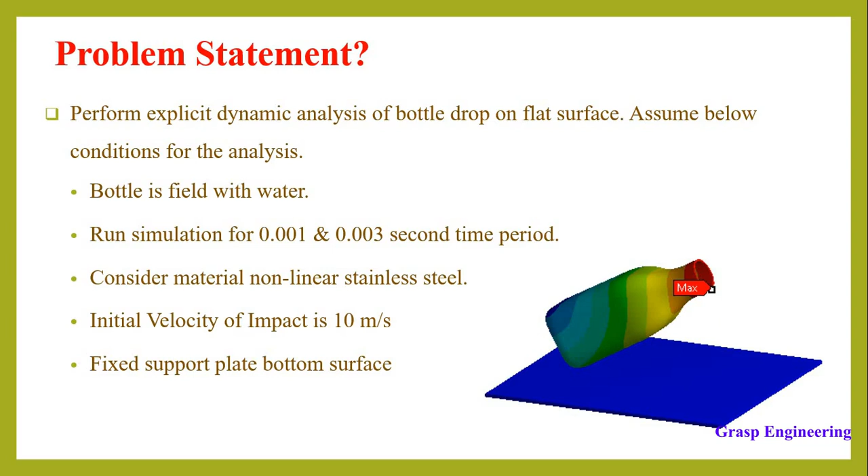So what we'll do now is go into our ANSYS model, and there we'll perform this simulation.

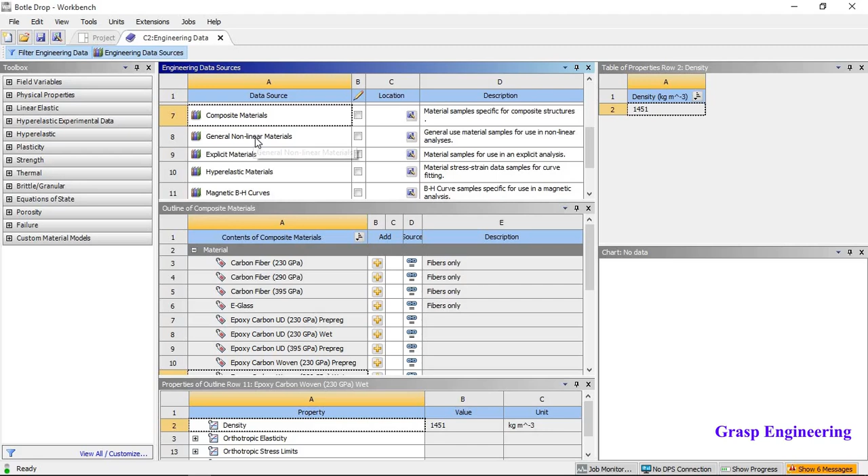In order to consider a new material, click here, go to engineering data source, and from here you will find that if you click on a different category, the material details will differ for each respective group. For general materials you will find options ranging from aluminum alloy to grey cast iron and stainless steel. For our case we need a non-linear material, so click on the category or data source called general non-linear materials, and whatever non-linear materials are available will show on the list.

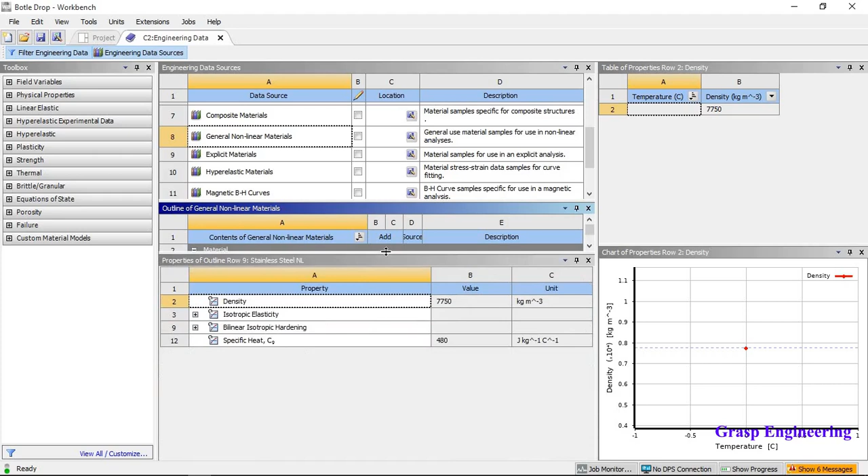Here we need to consider stainless steel. To do that, click here, and once clicked, it will show a book symbol, which depicts that you have incorporated this material, stainless steel non-linear, into your list. These are some of the bilinear isotropic hardening materials, and you can see the material details here.

Now let's close this, and here you can see we have considered stainless steel as the material. If you want to change the color, it will reflect when you assign this material. Close this and now refresh.

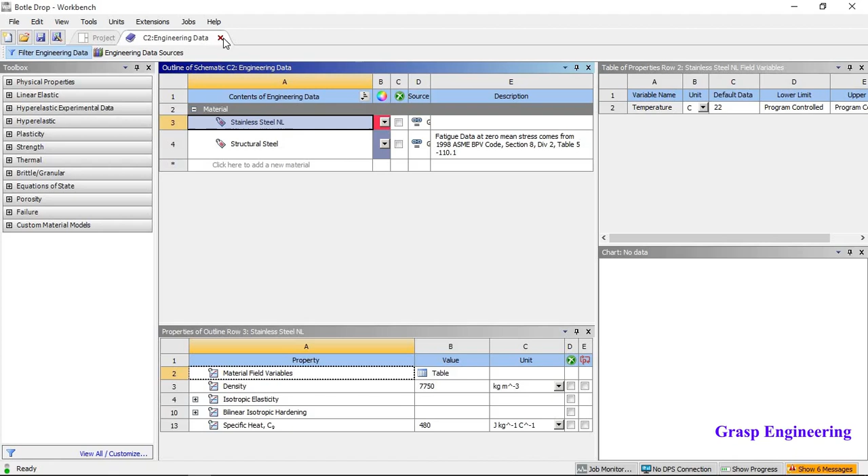Okay, now we will directly go to our model. So if you see, this model represents - let me show you. This is nothing but your bottle and this is your flat surface.

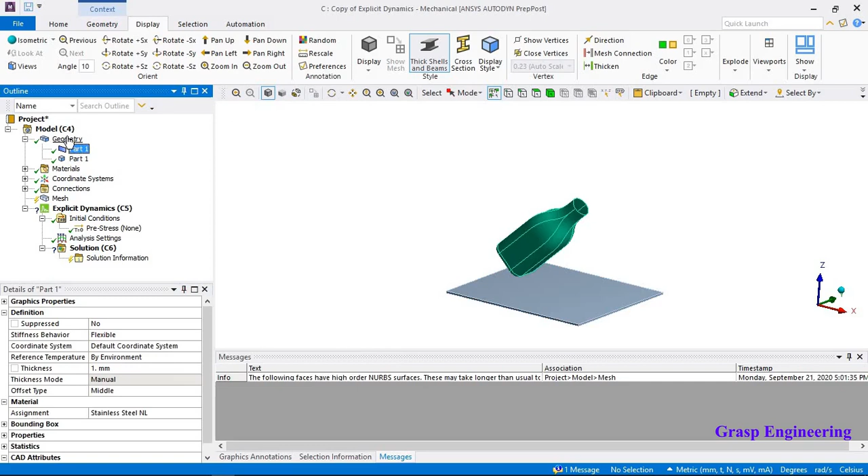Let's consider material change from here, and here we will consider stainless steel. Similarly we will change this from structural steel to stainless steel. Now if you click here and change the material, you will find the different color code as per the material. Okay, that is all about your material.

Now the next thing is you will also find the materials which you included in the simulations, and then the connections - this is also important. By default you will find the body interactions. The formulation is penalty-based, so I suggest no need to change, just keep this as program control. Based on the tolerance value, it will consider when the impact will happen.

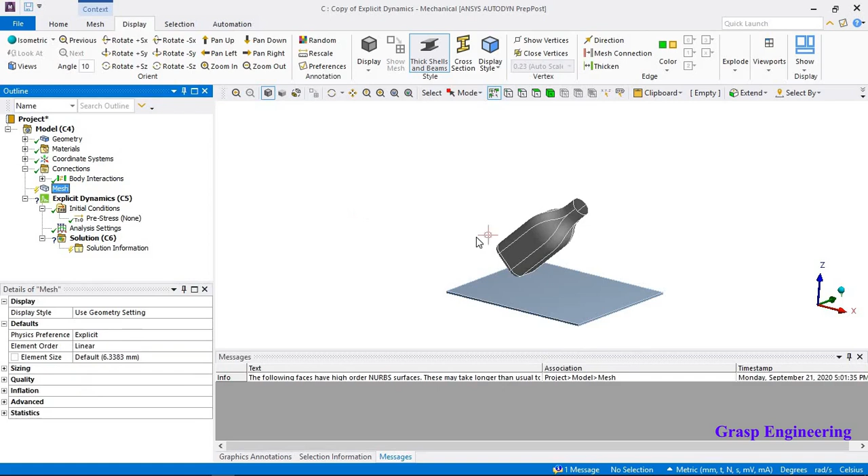Now the next thing, for the meshing, let's right click and generate mesh. Let's go with some global size, and if needed then consider the local mesh sizing. Basically, if you see here, this is nothing but your explicit dynamic, so you just need to drag and drop from here. Once you consider this explicit dynamic, you will find that your physics preference will automatically change. If not, then you need to set this physics preference as explicit.

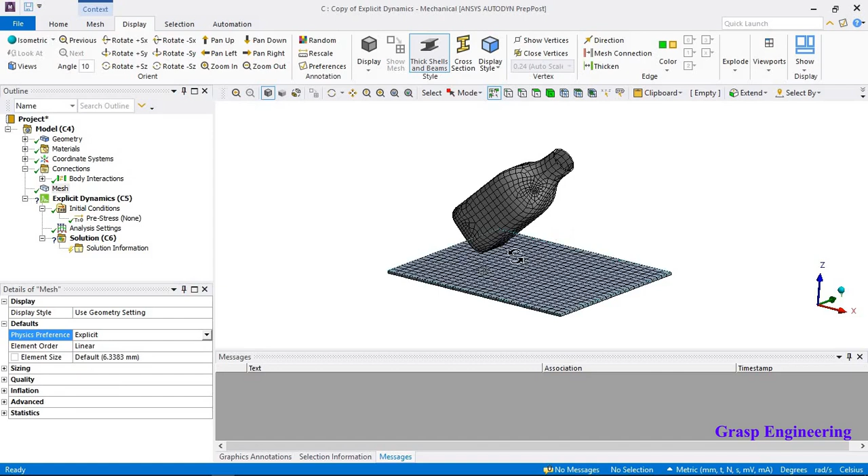Once you consider this, you will find that your element size or mesh will reflect. In addition, you will also find that here it is single order - there are no mid-side nodes once you click on explicit.

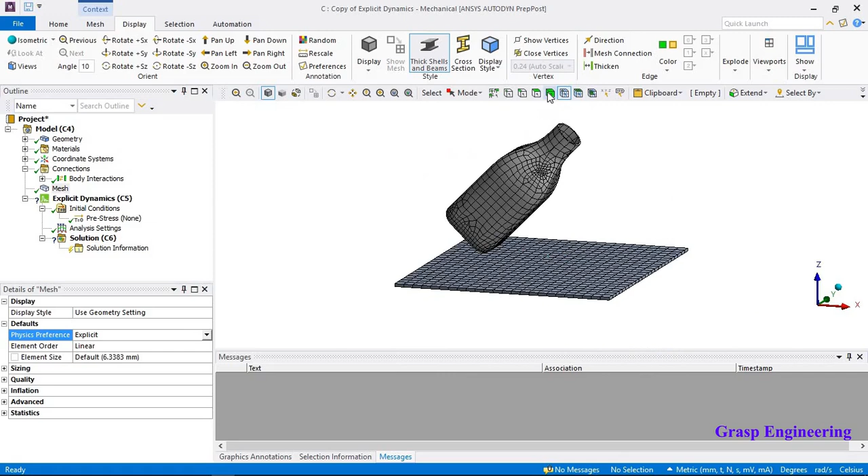Okay, now based on the global size it looks okay, but still we need to refine this. Always remember that it will greatly affect your simulations, because this minimum element size affects your solution time in case of explicit dynamic simulation.

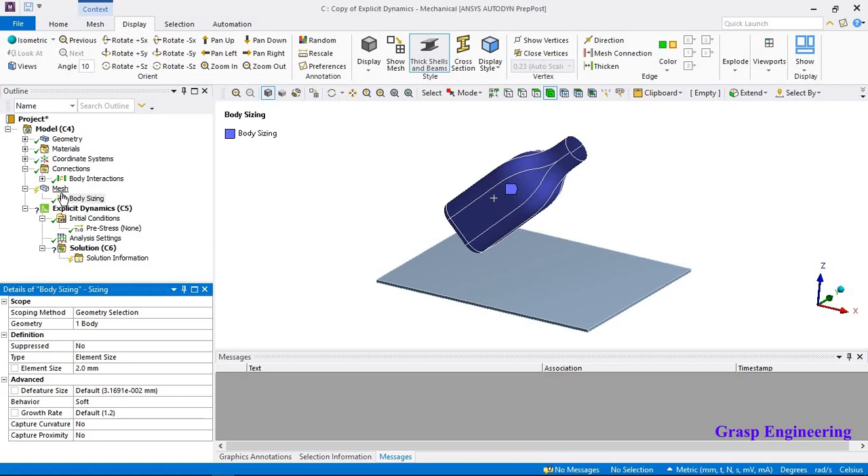So let's first define - select this, insert sizing. Let's put here sizing as 2 mm, and here let's define it much higher because that is not needed, so let's define here as 10 mm. Let's clear the mesh and now try to generate the respective mesh.

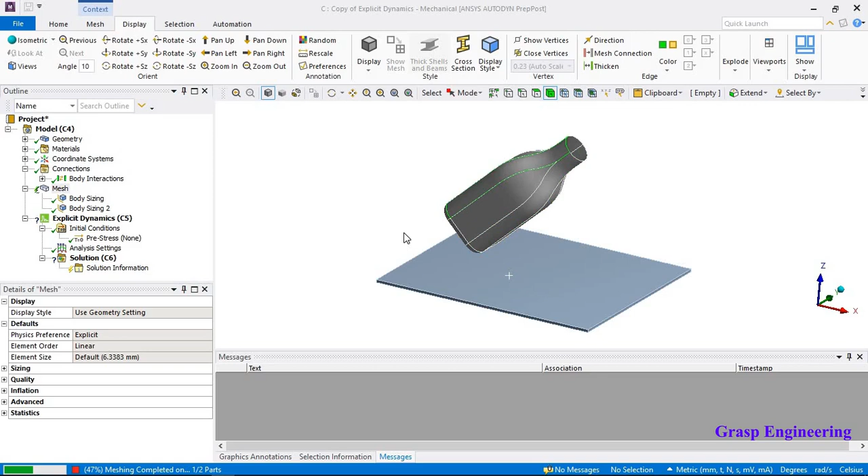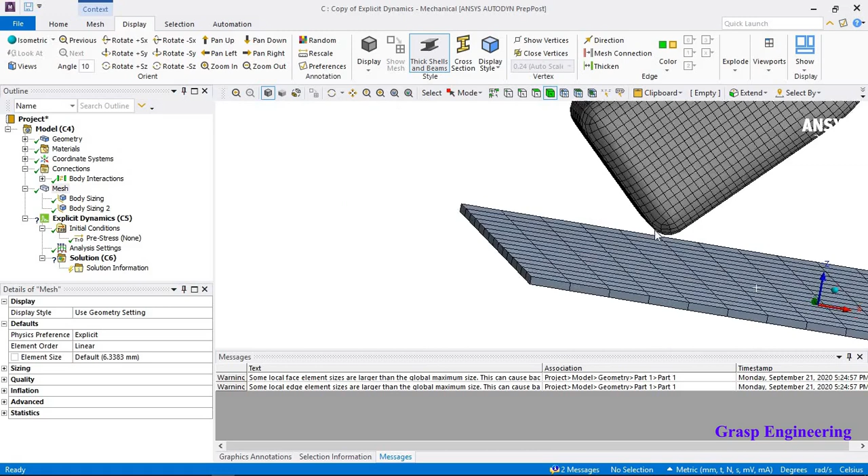It will take some time, but you can also consider the virtual topology. Basically it will merge the adjacent faces, so that will avoid extra mass scaling when you consider the virtual topology. Now if you see, this mesh looks okay, or quite good.

Let's check at the downside, it also sounds okay. Let's hide this and check, because this bottom face is really important - that will affect the simulation.

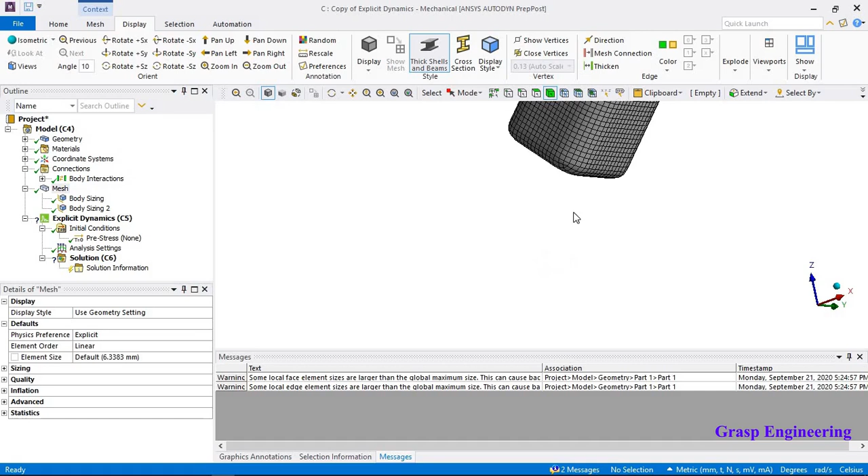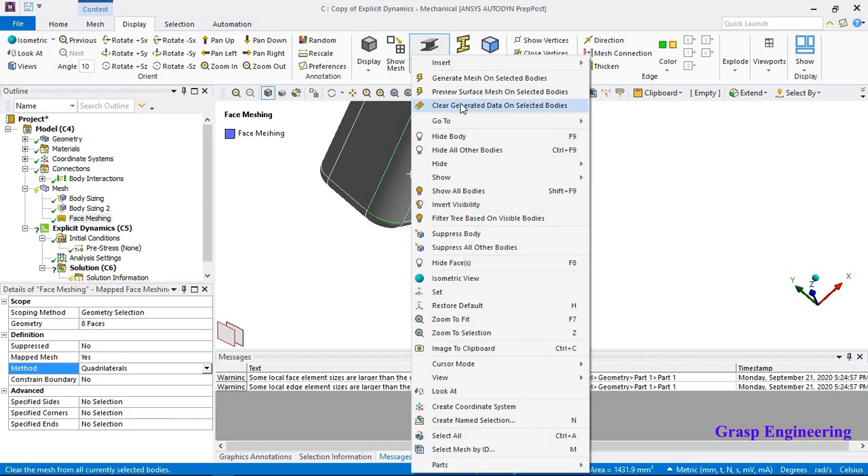Now if you want further - let's see, if you want proper mesh over here, you can either go with insert and you can see the face meshing. Let's clear the mesh on this body and try to generate. So it will create a complete map mesh, so no triangles will be there.

Now if you click over here, you will find the perfect map mesh, because this will impact the respective faces of the flat surface. Okay, basically these faces.

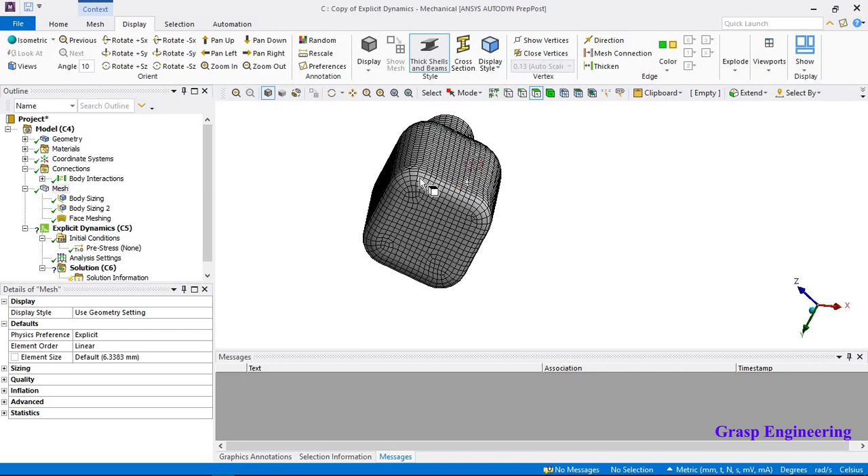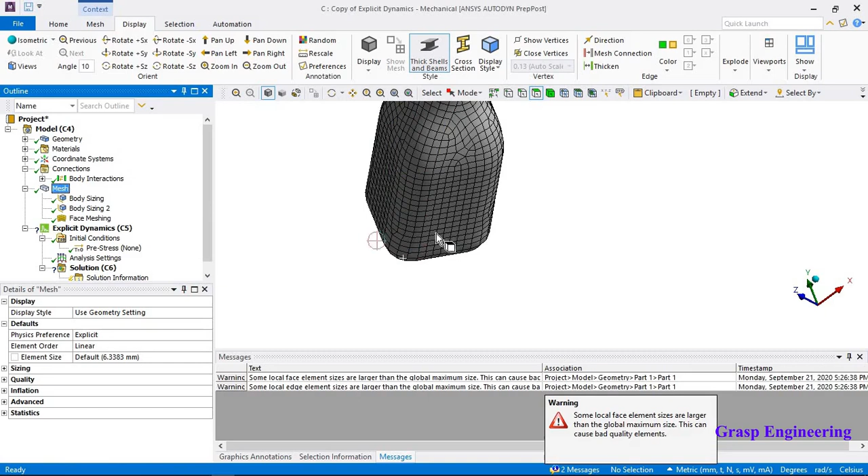Now let's do one thing - clear this, and I will put here 3 mm, and let's see. So like this, you need to do trial and error, and select the proper mesh size for your simulations. So now if you see here, the elements become quite coarser compared to the previous one.

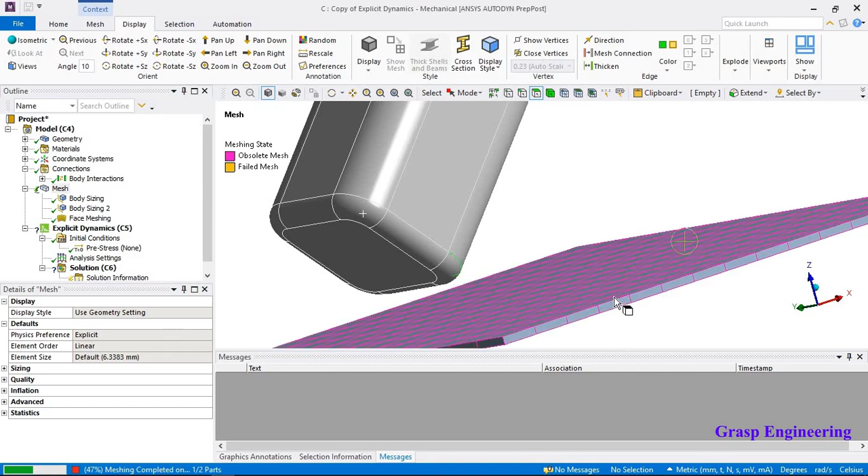So what I will do now, I will further change it and keep 2 mm. Let's clear this and try to generate the mesh. Show all bodies - so now it will perform the mesh further.

Once our mesh is done, we can see that the mesh is quite good. Now the next term is...

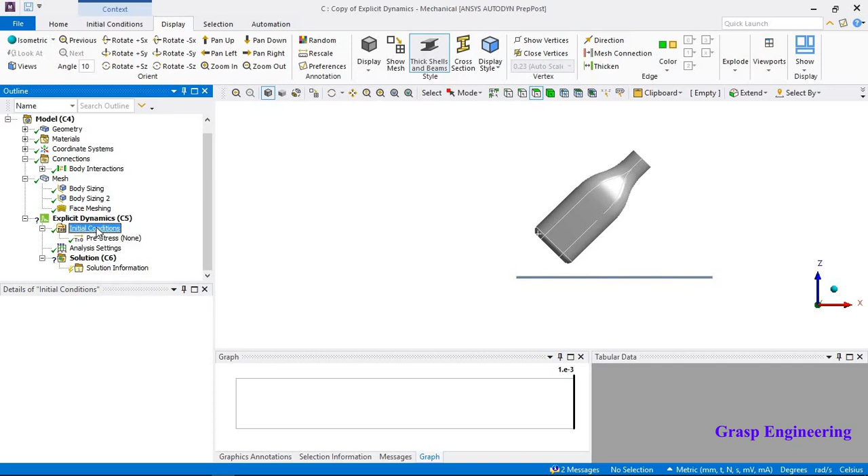Let's define the initial condition. Right click over here, initial velocity, and as we know we can select this geometry. Here we can define 10 millimeter per second, and I will keep this along the vertical axis. Okay, apply.

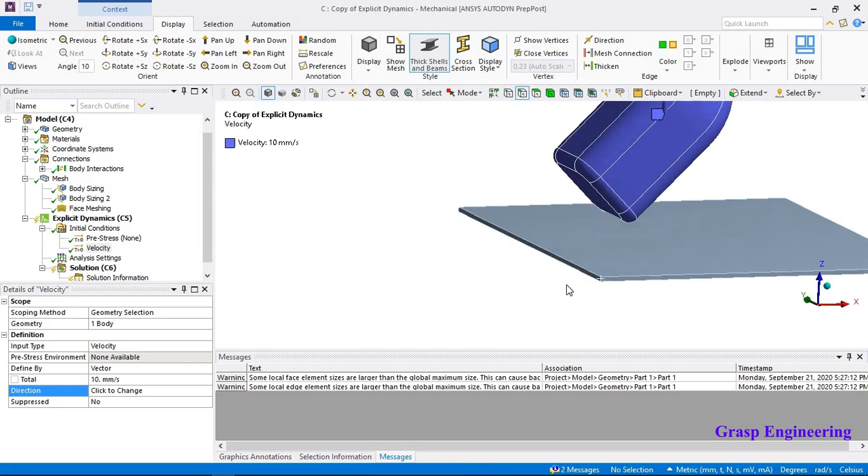Now this is all about velocity. Suppose if you are doing a pre-stress simulation, in that case you need to first perform the static analysis, and then connect that static with the explicit dynamic. You need to connect the static results to explicit dynamic, so you will find that the pre-stress effect will be included, but for the present case we will ignore the pre-stress effect.

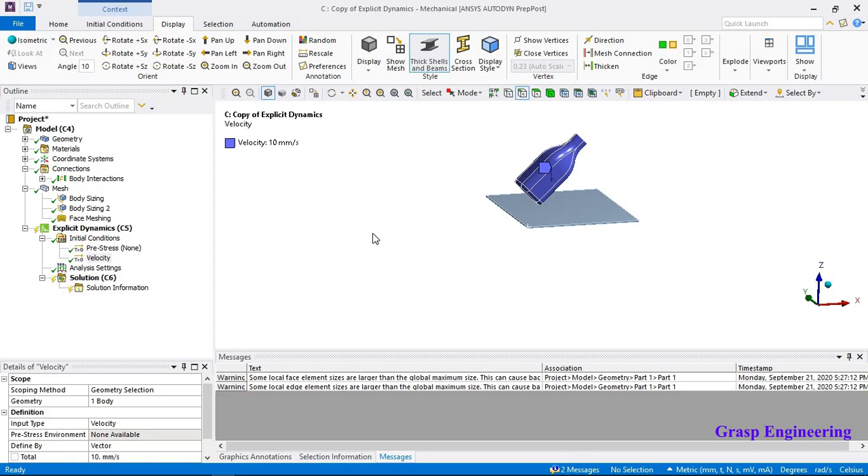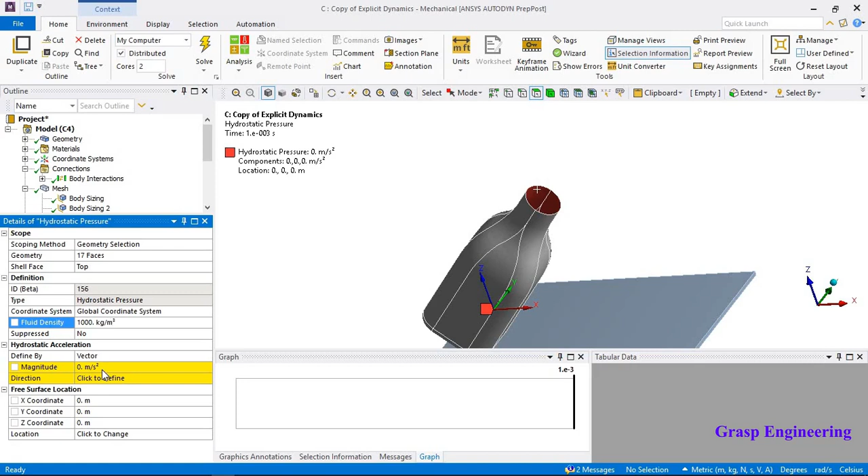Now the next condition is that we need to consider hydrostatic pressure, as we are assuming fluid will be present. Just extend to limit and you will find that all faces will be selected. Now let's change the unit, and let's define the fluid density of 1000, and we know that 9.8066 is the gravity.

Now once you have defined the gravity, you will further come to know the hydrostatic pressure is already applied inside this respective bottle. Now let's change unit, and here let's define the axis further. So what I can do now, like this, apply. Okay.

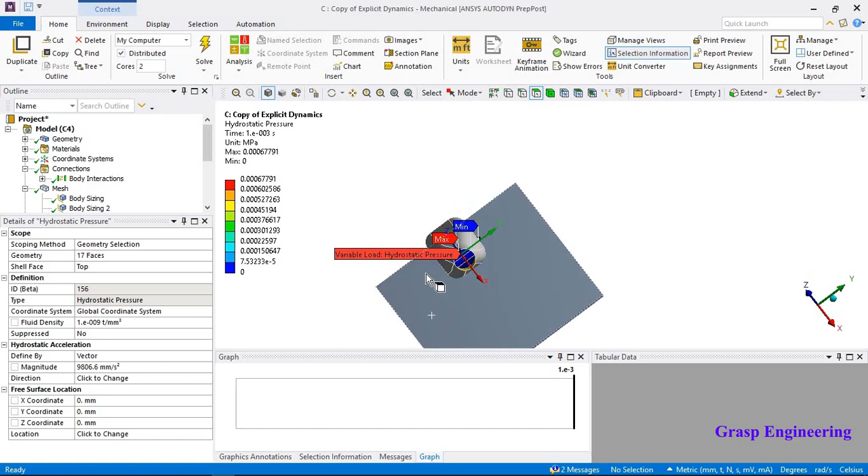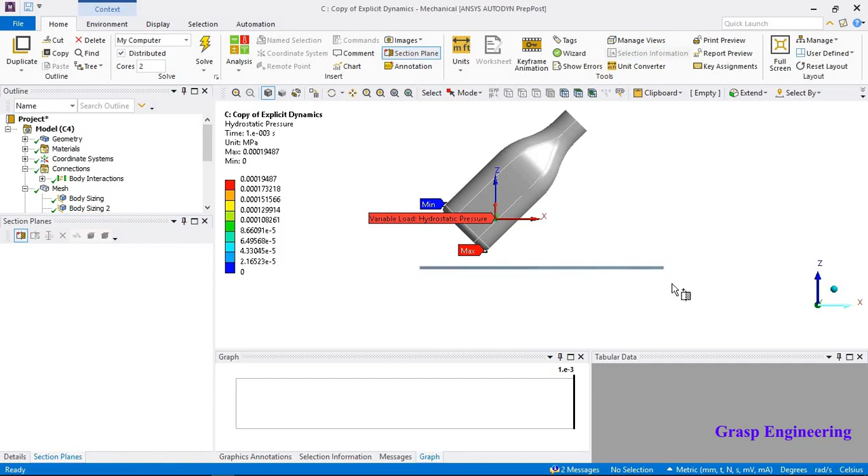So if you see here, we had considered the respective direction, applied the weight with acceleration 1g, and applied a fluid density. Now in order to see that, let's go to section plane and consider from one face to another, and see how it is showing. You can see that at the bottom you will have a higher pressure, and it will drastically reduce. Now let's increase this height.

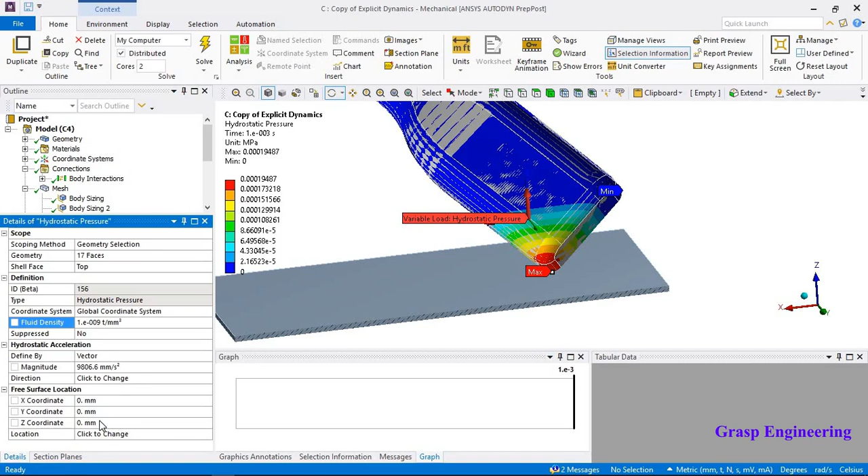For that, I will go here, and in the z direction let's put 1 mm, let's put 3 mm, or let's put 10 mm. You can see how it is increasing. So now you can see that our liquid is filled like this.

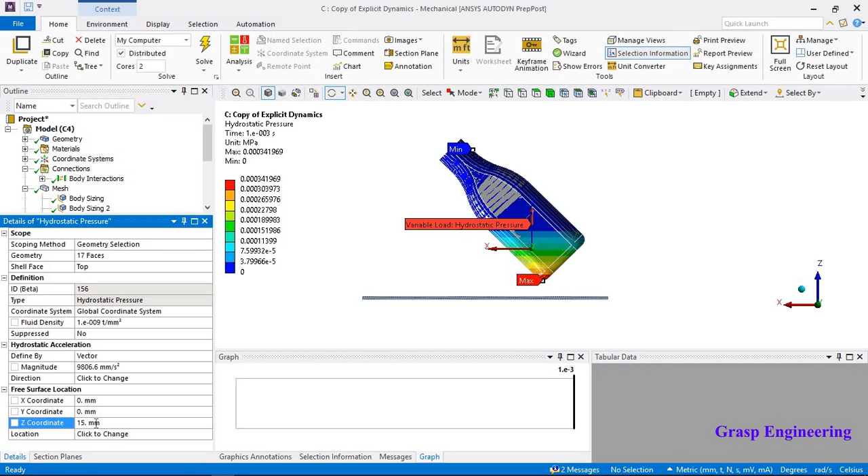This is our assumption. Generally it should be vertical, and when it is vertical you will find this axis is on the top face, and you will have higher impact on the bottom. So let's put 15, or let's put 25 now, assuming the liquid is filled up to this. Now I will further increase this up to 40. Now you can see how it is varying with respect to height.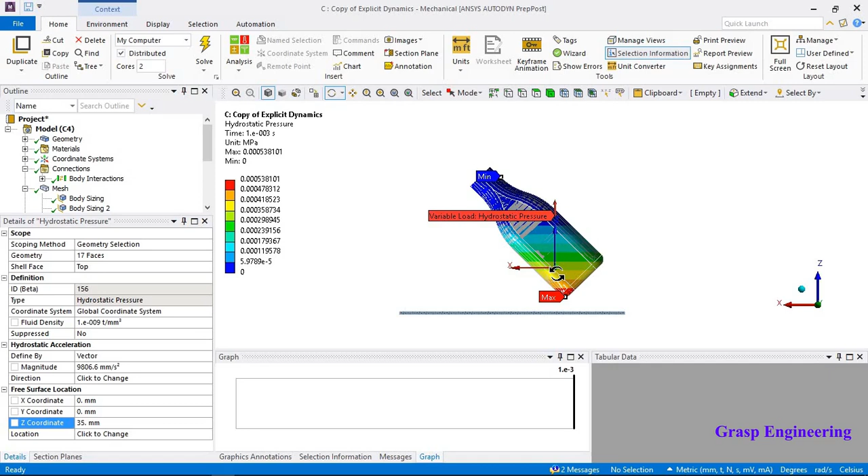So this is just the method to incorporate the hydrostatic pressure. You can even ignore that, this is not an issue. But if you want to consider it properly, because you are considering the fluid, you should go with CFD. Then you will get some respective pressure, which you need to import into FEA, then do static analysis, and then incorporate that into the explicit analysis. That is quite a lengthy procedure, so as an alternative you can consider the fluid effect with the help of hydrostatic pressure.

We had already covered one video on hydrostatic pressure, on how it will vary with respect to height, so you can go through that from our channel page.

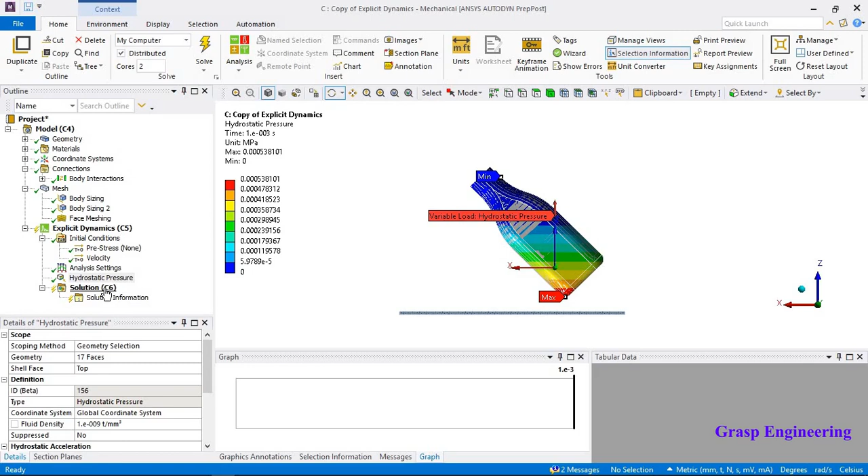Now the next thing we need to consider is the boundary conditions. For that, let's consider fixed support, select this face, apply. Now let's consider the first setting, click on explicit dynamic, click on analysis setting. Here let's set the end time like 0.001, so for this much time period we will see the impact or the drop for the respective bottle.

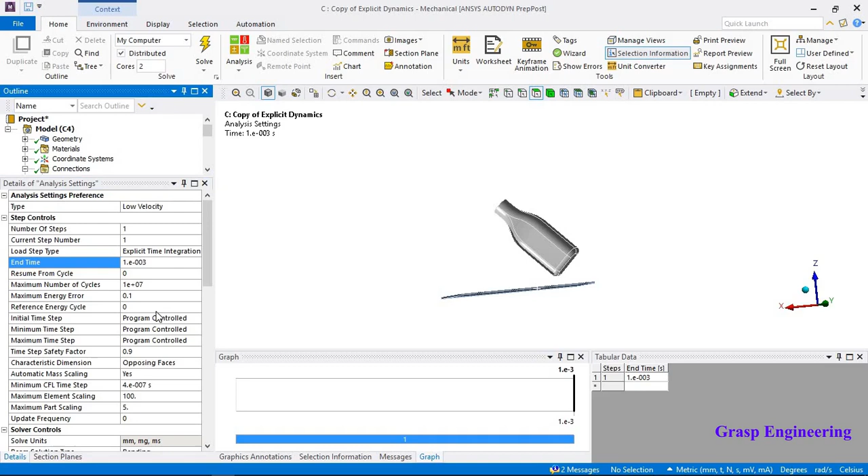Once your simulation setup is done, you just need to right click and solve the simulation. It will take some time to give you the results.

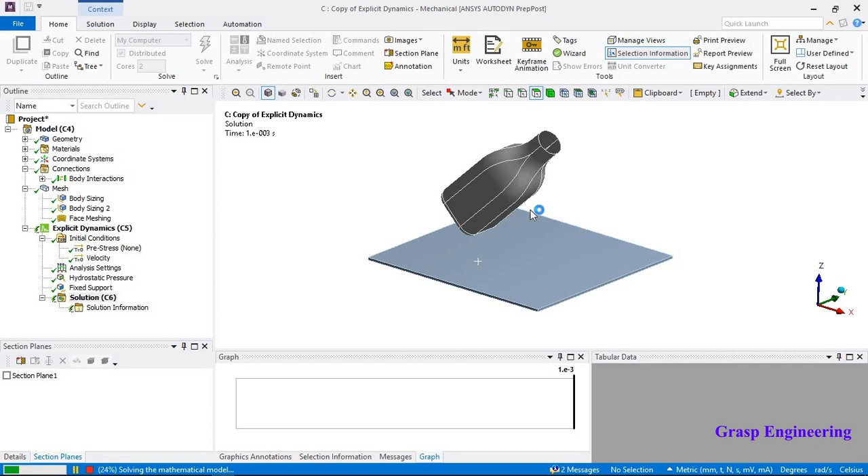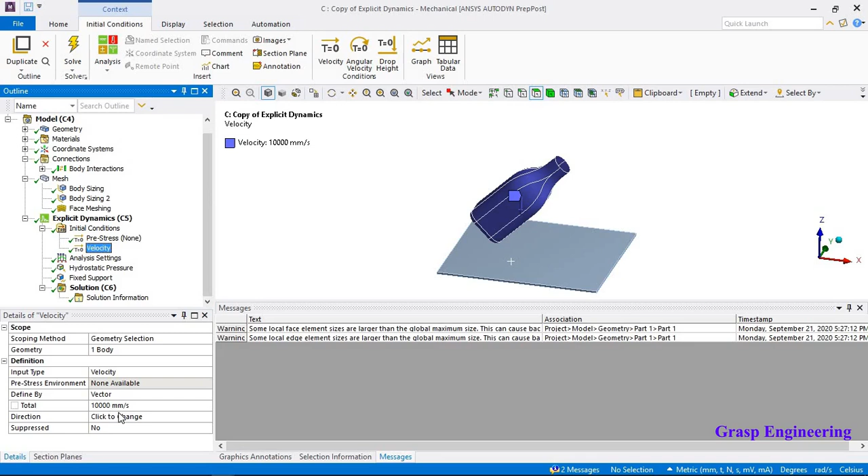So now if you see our simulation is performed, I did only one change. If you remember, we applied initial velocity, so it should be 10,000 mm per second, but earlier we considered 10 mm per second. So basically here you just need to make it 10 meter per second, and then we applied the hydrostatic pressure and fixed support at the bottom, and then we define the explicit time integration and end time of 0.001. I will suggest keep all remaining things as it is, or you can say the program controls, because there are a lot of settings which basically need adjusting if you are going to consider the explicit impact in case of a complex scenario.

Okay, now let's right click and insert further total deformation. Then let's see the strain, that is equivalent plastic strain, and if you further want to see the stress, equivalent one, von Mises stress. So these are the three parameters stress results we will see first.

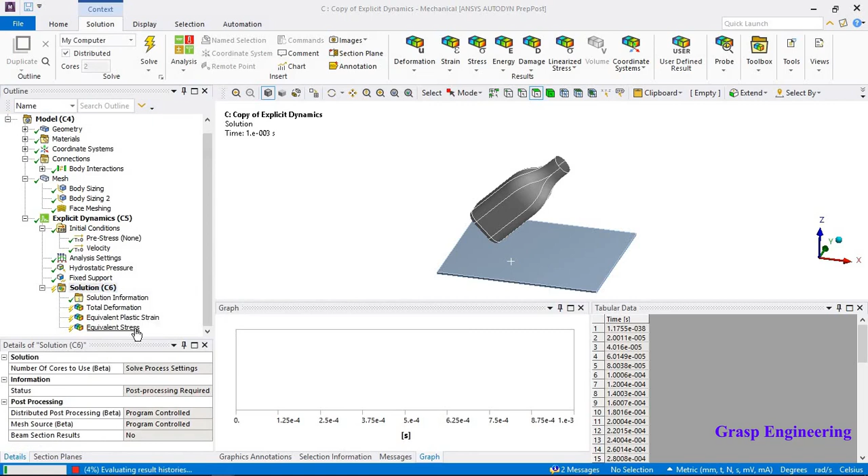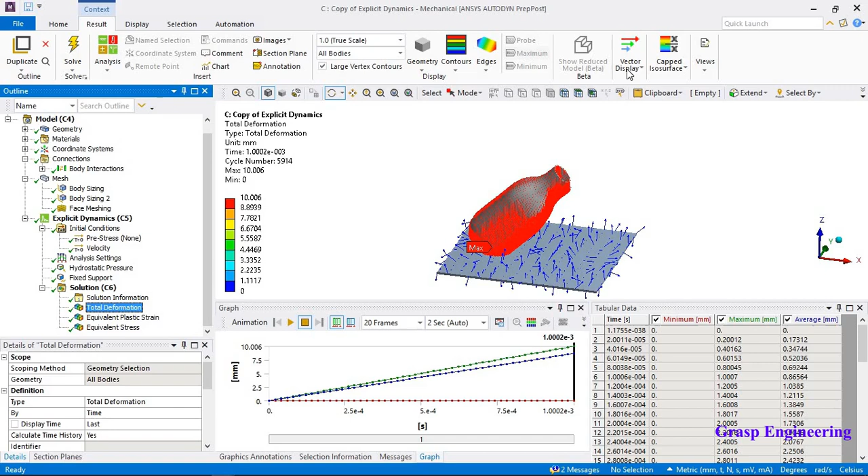The first one, let's discuss about the total deformation. So display, I will just keep uniform. Okay, so basically it is showing here the vectors, that we will also see later on.

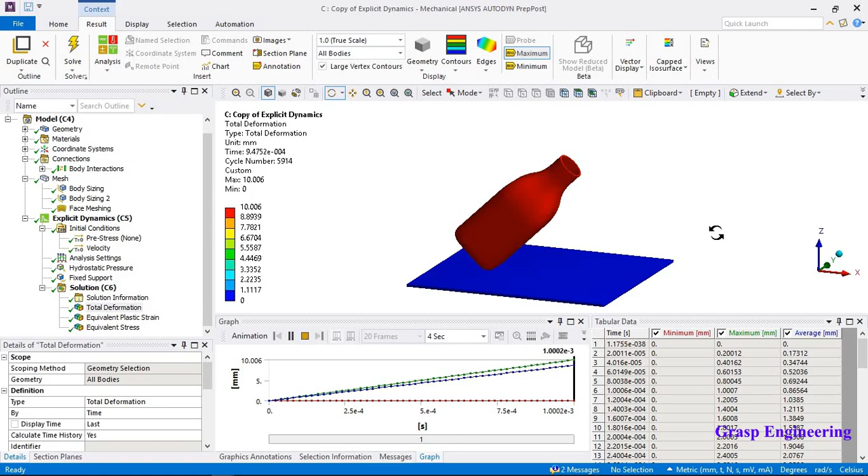So now if you see the impact, let's animate that and let's study if impact is happening or not. I will increase some scale and let's animate. Okay, now you can see how it is behaving. So it will going to reach up to that, but for the respective time frame I think that just touch approach is happening.

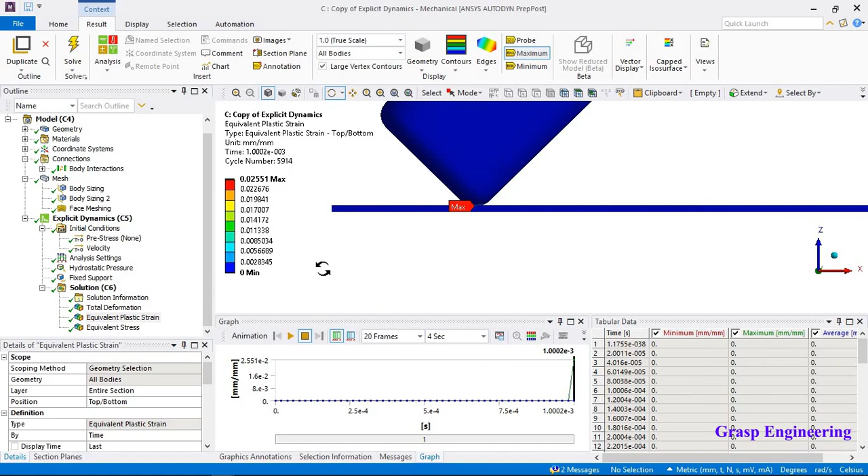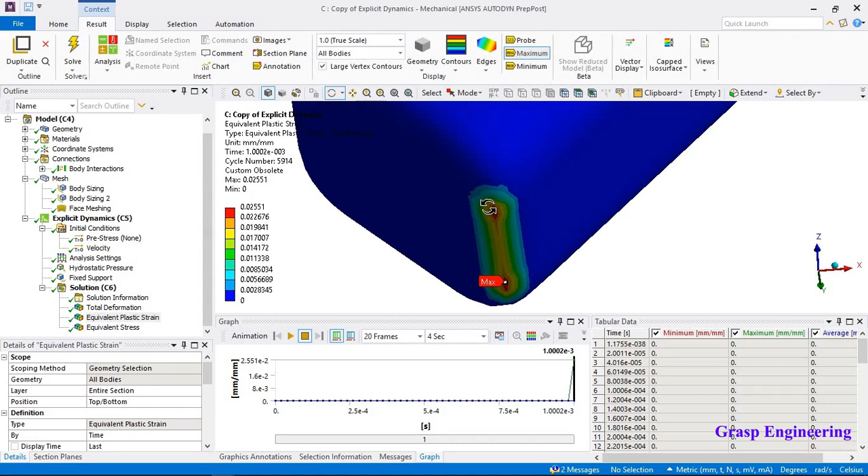Okay, now let's show all results and let's hide this. Let's see the plastic strain on this bottom face. Okay, there is no plastic strain on this, so basically only the bottle is deforming. So show all body.

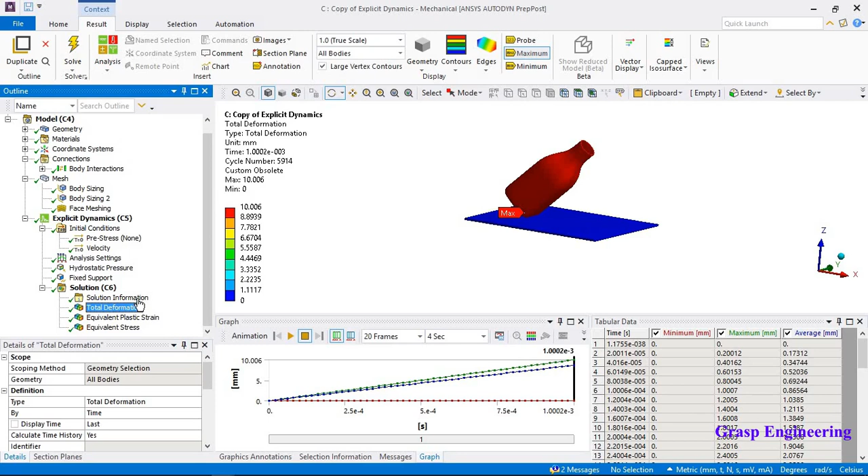Now as we know that for the 0.001 second time period, you will find that this bottle is moving downward and is just touching the flat surface. But basically what we are expecting, it should have some impact and it should go downwards. So that is not happening for the respective time period. So that can be also studied with the help of solution information, and here you will find the energy summary.

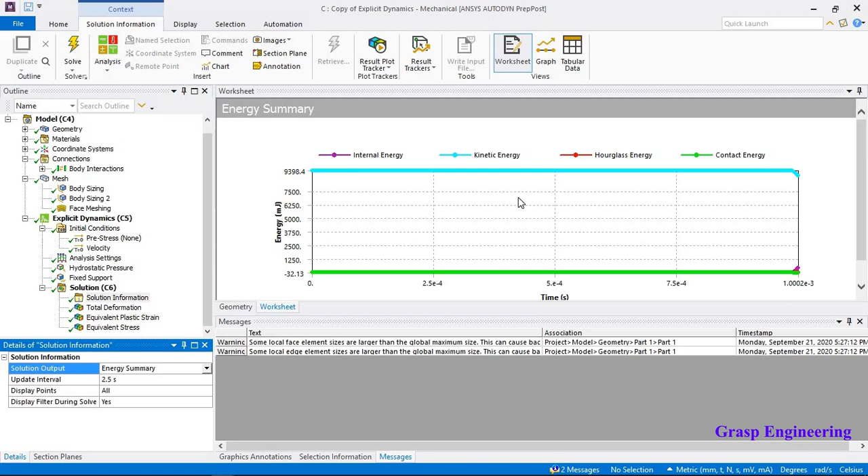So basically what we need to do is further increase some time period and we can see the further bouncing or impact for the respective bottle drop. So basically here the very first time we only considered 0.001. So let's increase that 3 times and let's perform the simulation. So I already did that.

So now you can see, I will double click and let's see here. Now what I did here, I only changed this time second, and once I changed that, I found that there is a change in the energy graph. So initially we performed up to this point, and from that point onwards you will find that this impact started happening. So at this certain time period the impact is happening and there is a change of energies performed.

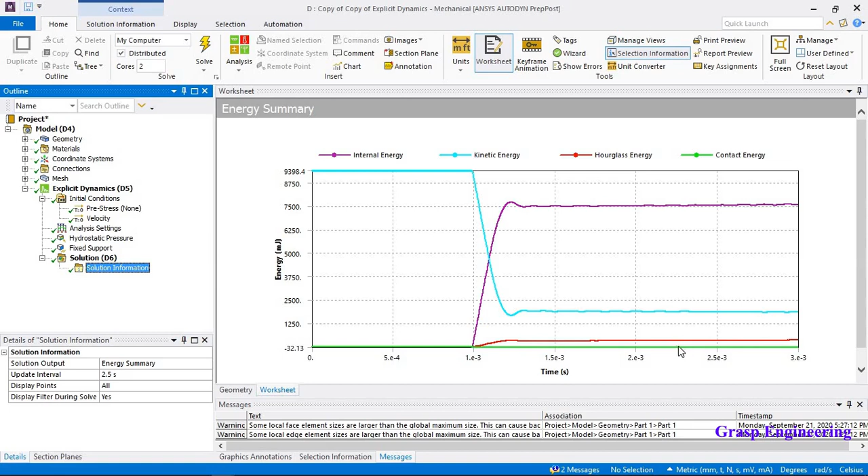So you can see that kinetic energy is going downward. So after the impact we will find that, and at the same time this internal energy which is present inside, that is called strain energy, which will going to be increasing after the impact. So basically the bounce back has happened, and also this is nothing but your hourglass energy. Always keep in mind it should be as minimum as possible. Okay, and the contact energy is constant over here.

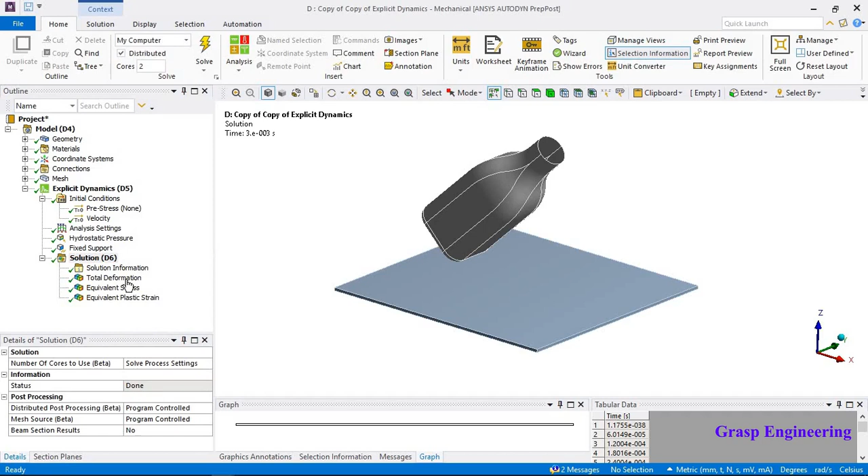Now let's see the deformation, let's see the stresses, the equivalent stress, strain, and equivalent plastic strain. So these are the three studies we will see now. The very first, okay, now we can see that the deformation from 10 to 26 is increased, and let's animate this.

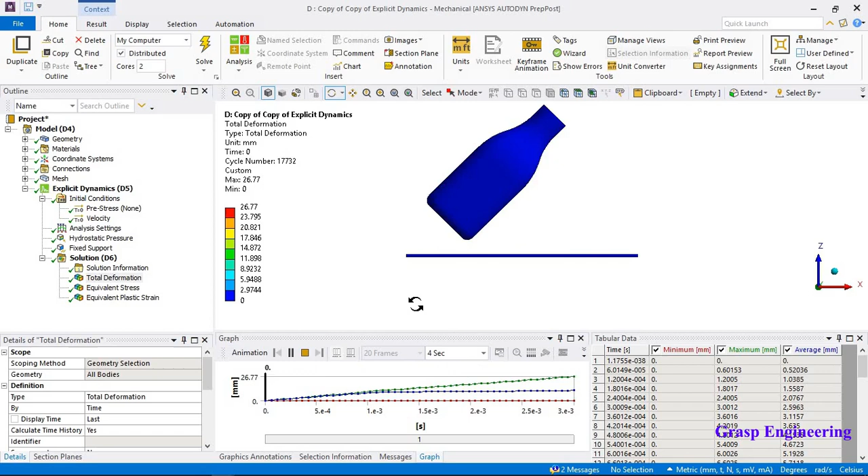Starting. So now we can see that the bottle is dropped, and further we perform this simulation for a 0.003 time period. So basically 3 times, furthermore we increase 2 times, and you will find how it is behaving. Okay, now once the impact has happened, it will try to move downward due to the effect of hydrostatic pressure and the weight of the bottle. So once further if you go on increasing, it will go down and you will find it.

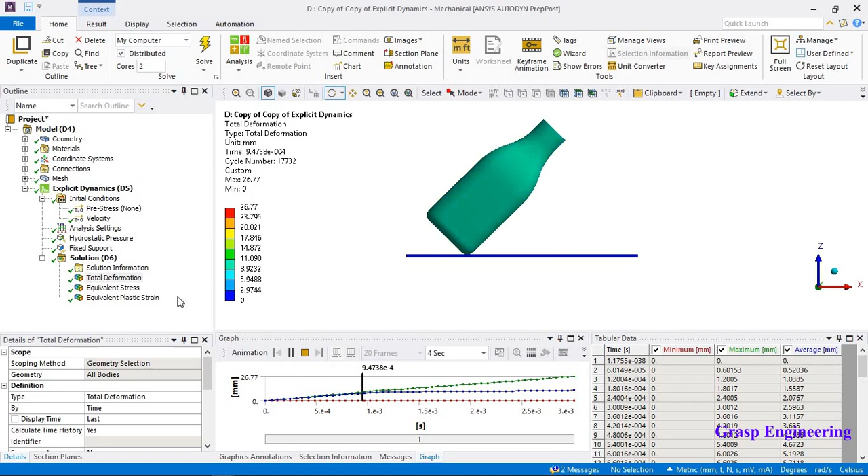Now let's see what are the stresses for this. If you see, the stress will definitely increase because now the impact is on the higher side. You can see that the bottle has a good amount of impact, and the plastic strain is also going to increase.

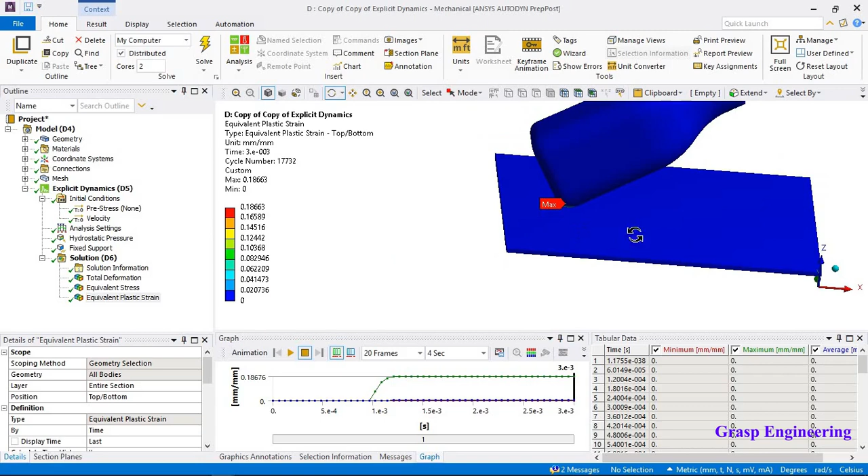So basically this bottom plate is quite stiffer, so that's why there you will not find any stress. But as your bottle is having a thickness of only 1 mm, if you click over here, the thickness of 1 mm, in general you can also assume that our drinking bottle thickness is the same as that.

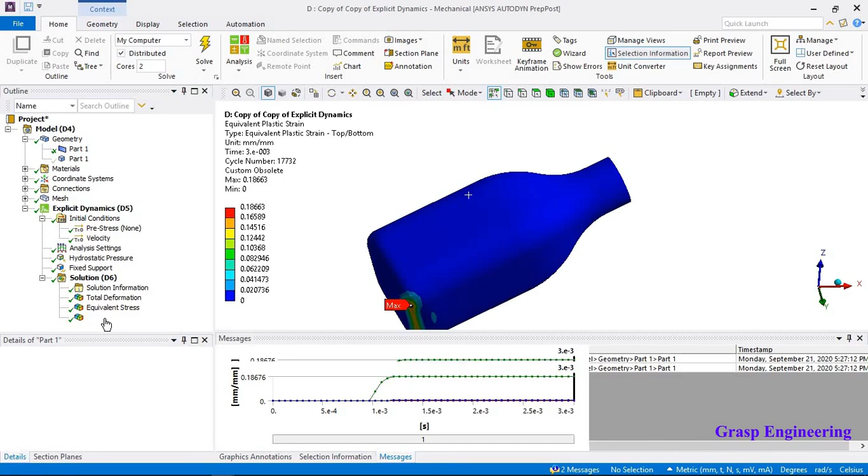Now you can see the plastic strain and also the stress. So basically the stress is as higher as at the impact location. So basically the first impact will happen, and then later on you will find the stress propagating on the remaining bottle portion.

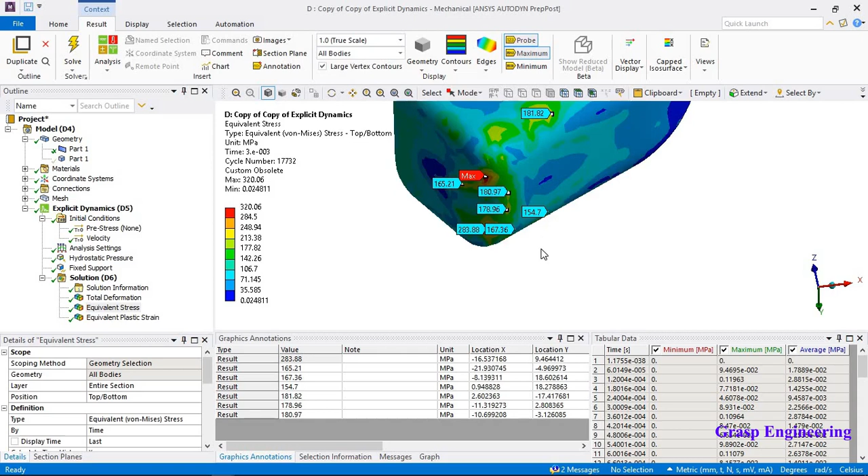Let's see the vector sum, or let's click over here. Then let's see the worksheet. Click over here, and from the worksheet we'll see some vectors. Right click, create user defined results. Similarly we will see for the element.

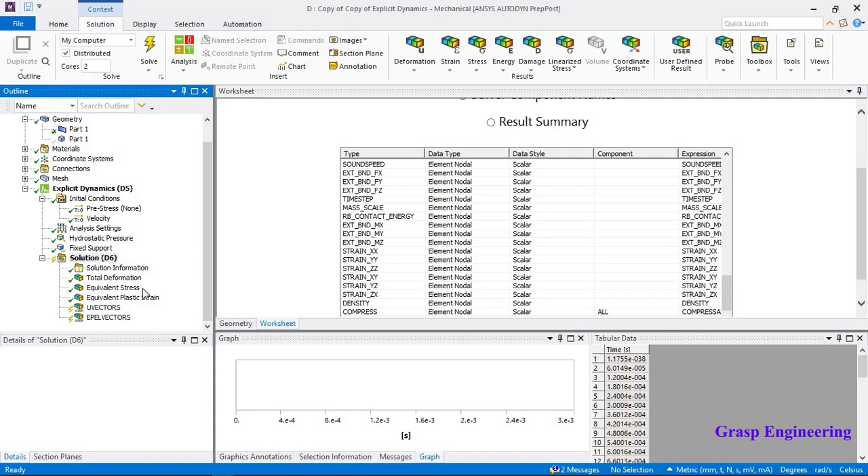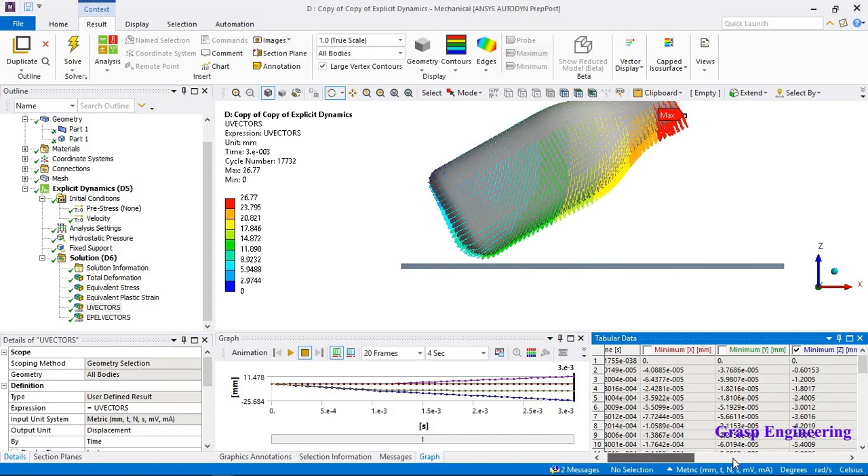Now let's see, evaluate, and you will find that - let's show all bodies, and here you will find the vector. So basically this vector will show you how it will behave. Minimum, minimum, minimum. So I will just keep maximum.

If you want you can increase the scale, or let's put the true scale, and let's click on the start position. Here if you want you can increase the vector display, so that you will come to know how it will behave once the impact happens.

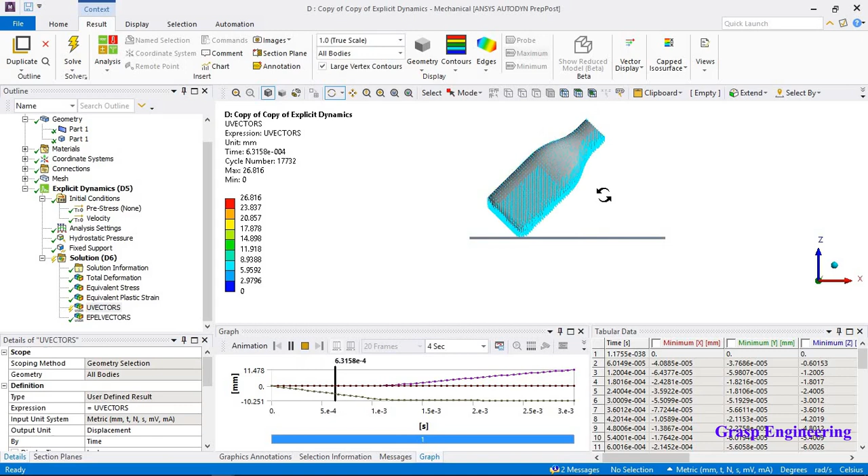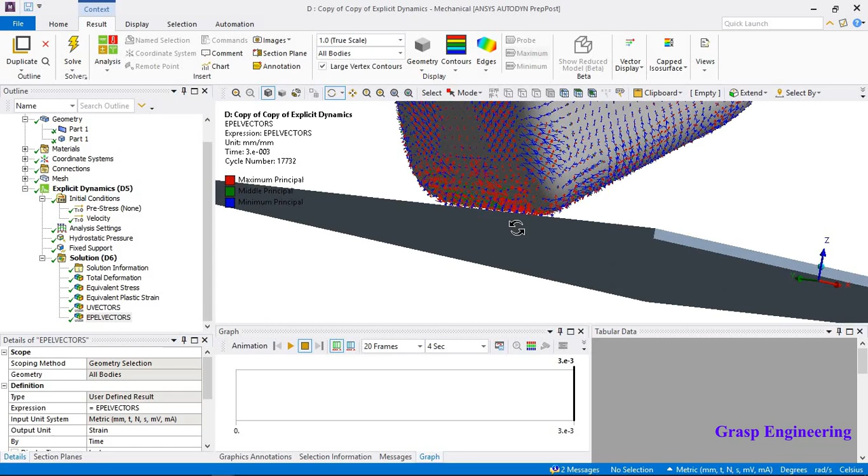Now you can see that the maximum principal stress is with the red vector. So what we can do now is stress max principal, and let's see. Now it is the same as that equivalent stress, as it is non-linear material, so you will find that ductile failure.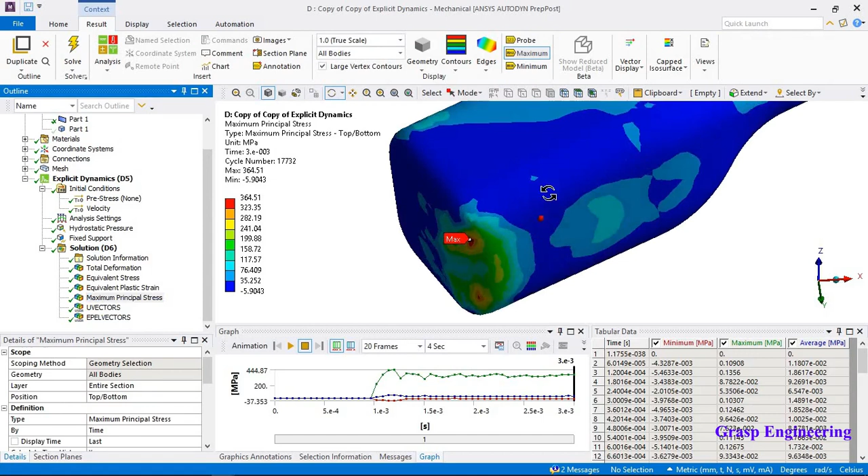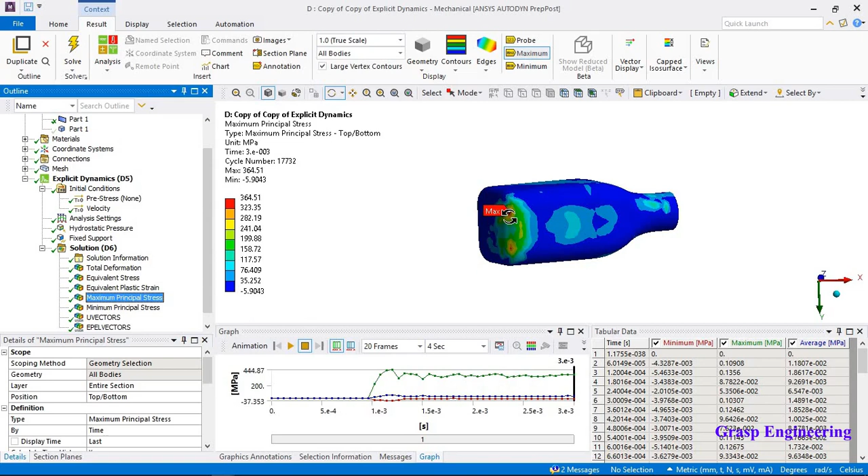Now see here, it is also on the - and let's see the minimum principal for the - so this stress will help you to strengthen your respective bottle location after the impact. So minimum will be over here, that is 211, and maximum principal is the same as the equivalent stress location.

So if you think that you need to increase the bottle thickness in order to reduce the stress, you can increase it at the bottom part. Okay, and then perform the simulation further.

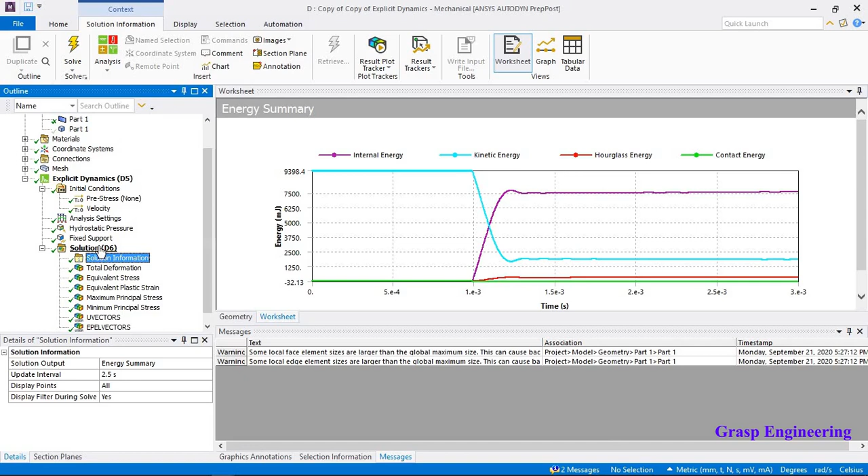So basically from the energy summary also you will come to know, if you run up to this location it is also okay, because impact is happening at this respective location for the respective velocity. Equivalent stress is there.

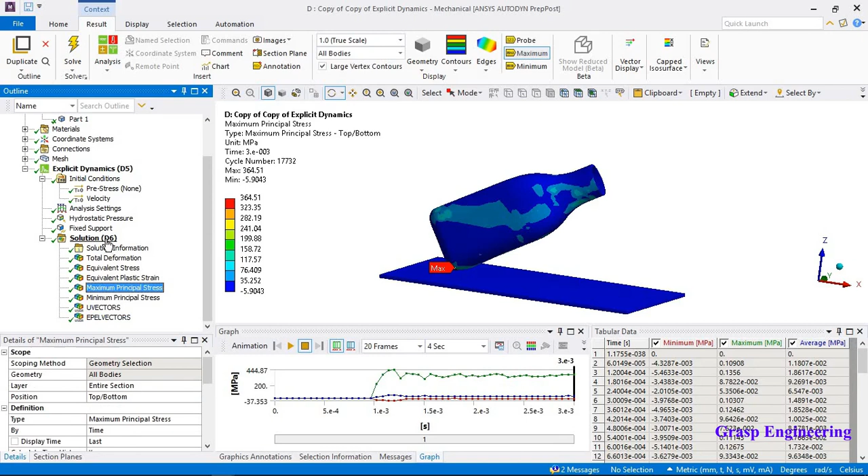Now the vector also we study, show all bodies, elemental, and if you see - now if you want further more vectors, but I think that is enough. The main thing you need to see here is how the deformation is happening. So basically once it impacts, this portion will move downward.

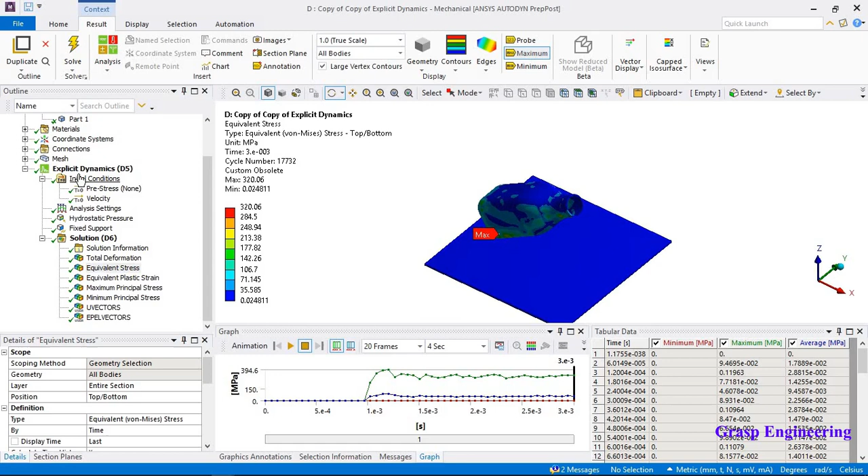Okay, so that's it guys, that's it from explicit simulation. There are a few assumptions we made, like we applied hydrostatic pressure, we considered the initial velocity as 10 meters per second, and we fixed the bottom face. So likewise you can make assumptions, perform the simulation, and after the simulation you'll notice higher stress at the bottom location for a corner drop.

So if you want you can further change the direction, make it vertical for a corner drop, then edge impact, corner drop, then side impact. So likewise you can perform the simulation, and at the end you need to decide what thickness you need to consider for the respective bottle bottom face.